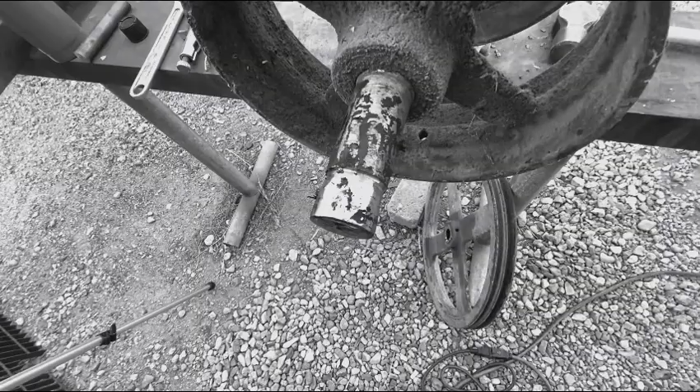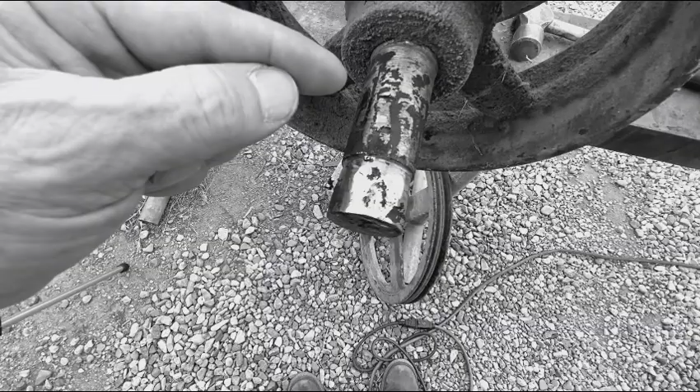So I was saying, unfortunately, the end of the shaft got pretty boogered up with the grinder and everything. So I think what I will do, since I still have over 2 inches here, when I get this all apart, put this shaft in the bandsaw and just cut it off.

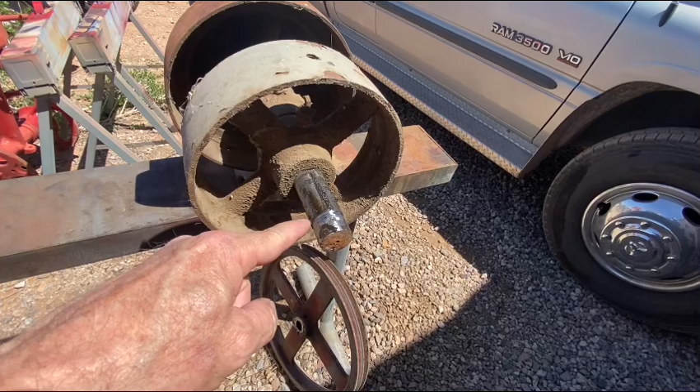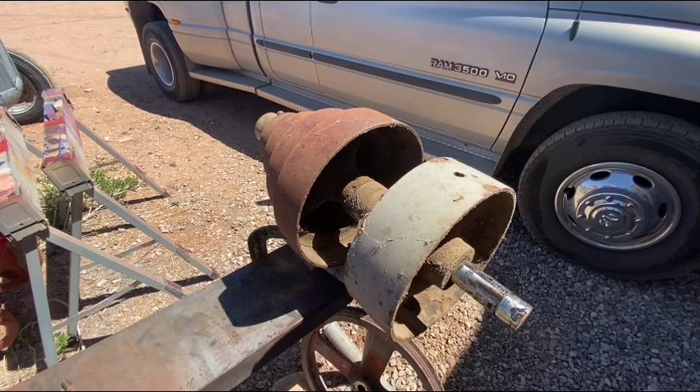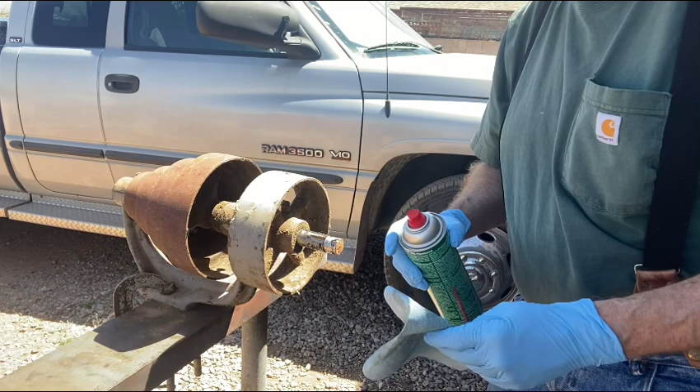I have got to clean this shaft up and then start loosening set screws, set bolts. Sorry, the shadow there, you probably can't see that. Square-headed set screw there. And let's start disassembling this whole thing. Prep it for witch's brew and wire wheeling and going in the bandsaw and cutting that ugly nub off.

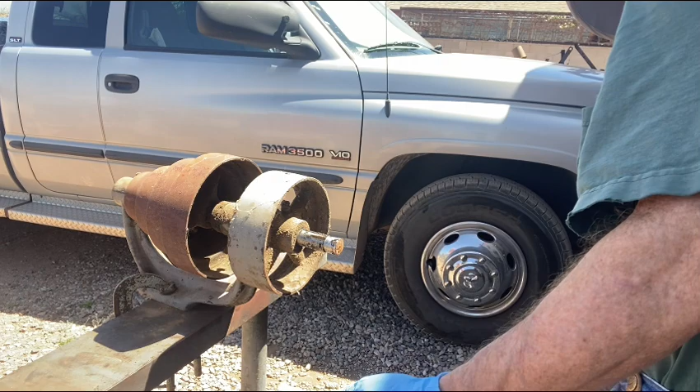What is this, around the 20th of April? Normally, this time of year, here in southeast Arizona, we are in the 90s. But for some reason, it's been this way all year. Winter was cold. We are in the low 80s, which is unseasonably cool for us. Normally, I'd have the old Portacool going full tilt in the shop right now. But no, it's not hot enough for that. Humidity today is like 19%. So the old joke, in Arizona, it's a dry heat.

And there's 2 set bolts on this boss right here over the shaft. One's missing. I'm not sure what they're supposed to do. Because if you tighten it down, it's going to lock on that shaft and then this whole thing won't spin at all. So I'm not sure what that's about.

Anyway, get this square-headed bolt inside this pulley off, and believe it or not, I don't know if you can see it or not, the 12 millimeter fits it perfectly. I thought that was interesting. Now it's a pretty tight fit between the spokes of this belt pulley.

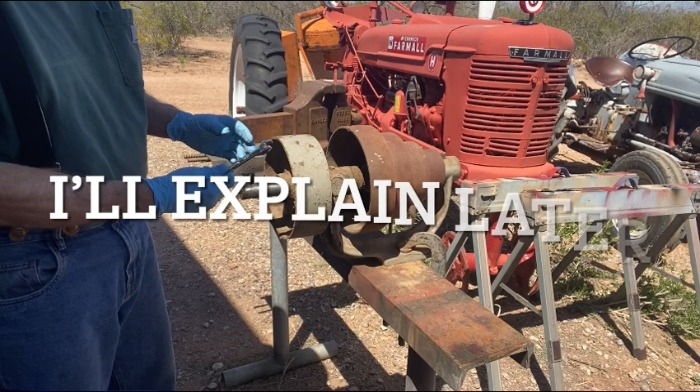I can't get into the mind of a mechanic or a machinist 120 years ago, especially when they didn't have modern crescent wrenches and stuff like that. And the big old clunky Coes spanners they had, although they did have small ones. But I'm curious what they used in the way of a spanner to get inside here and tighten up this square-headed set bolt. Yeah, I should probably do some research on that. Really not important in the grand scheme of things.

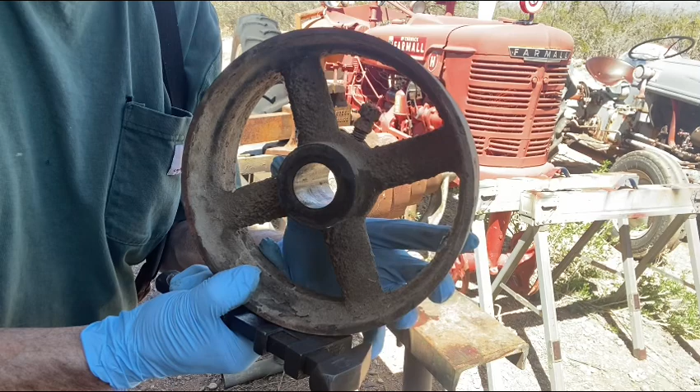It's coming, slow but sure. All right. So you can see that set bolt between the spokes of the pulley. Now this is a very small Pexto adjustable spanner, patterned after the Coes adjustable spanners. This barely fits in there between the spokes. So that would work, but it would be really clunky.

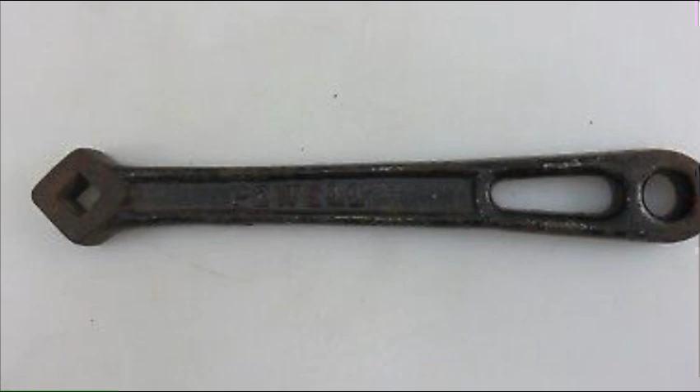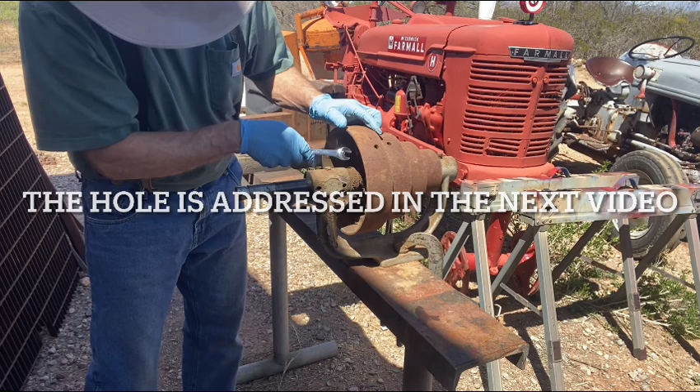We got the same deal on this step pulley here. There's a threaded hole drilled right in the face of this second pulley, right directly above the set screw that holds it in. So, yeah, mystery continues. Obviously, they came up with a mechanical means to install and loosen these set screws. I find this kind of stuff fascinating, vintage machinery archaeology. I mean, I'm a tin bender, and this kind of stuff fascinates me.

You know, I keep telling you guys I'm a tin bender, yet I don't do any sheet metal work on this channel to speak of. Well, half of my career I did sheet metal. The other half of my career I was a ships production controller, specialty in scheduling. I know that wouldn't be video worthy, but tin bending would. I should do something sheet metal for you guys, just to prove I used to do it.

Before I get too carried away here and damage something, I forgot. There's a collar on here that's got set screws in it, so I don't want to go beating on that shaft anymore and leave a big old groove in it. I got to clean all of this gack out of this set screw here. There may be more than one. Let's have a look.

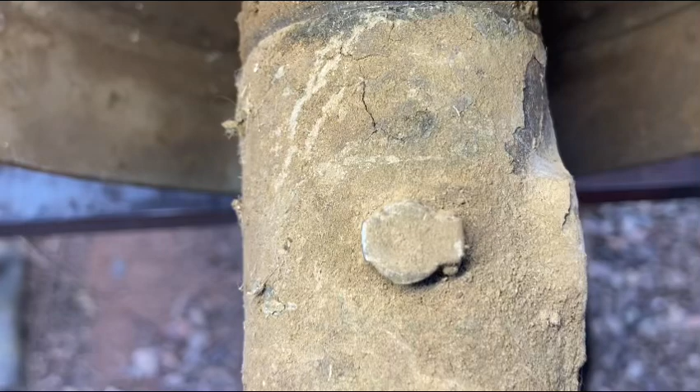Oh, that squeak sounds great. Nah, it looks like there's only one. Let me get this set screw out of here, and then we'll try getting that shaft out of there. Normally you would expect to see a socket head cap screw, set screw in there. Well, that is slotted. I better soak some liquid wrench in there, because sure as shooting I'm going to gall up that slotted screwdriver head.

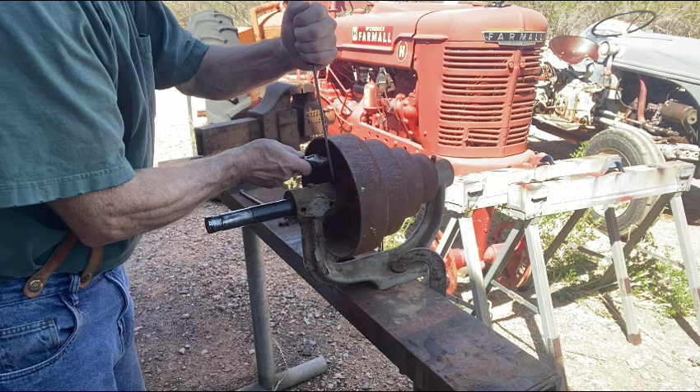I think somebody has had this apart before in the past, because in the face of this pulley there's another hole that's drilled. It's not threaded, but in fact it's right there, and I think that is actually supposed to align over the set screw in this collar, because now I got my screwdriver in there at an angle. Hope I don't strip this out.

Oh, look at that. It's like everything else on this drill press. Comes right apart. Well, I can't exactly say that. Most everything in the way of fasteners came right apart. Some of the assemblies were pretty stubborn. So, yeah, that was a little slotted set screw. Not that that's really interesting, but you get the idea. When I put this back together, it's going to have a socket head set screw in there. I'll double check, make sure there's no other set screws hiding here.

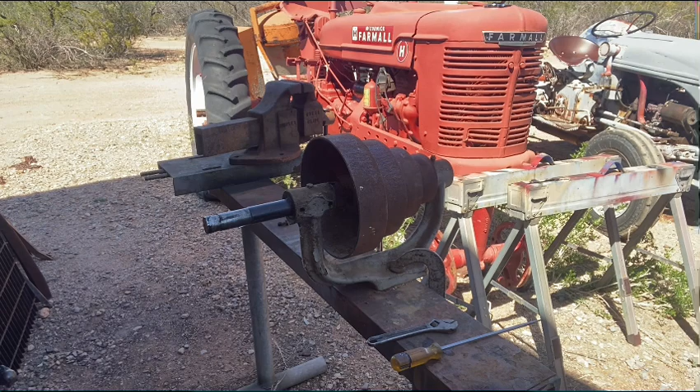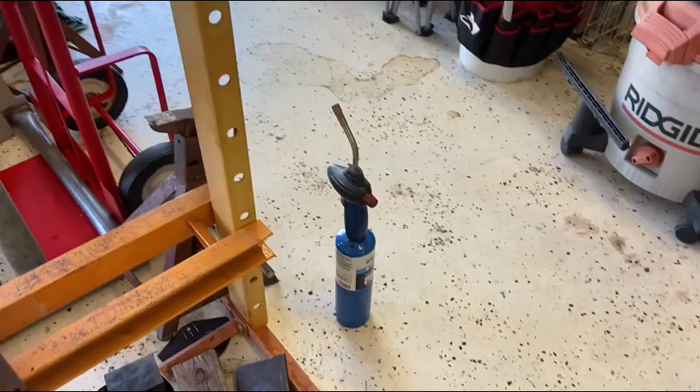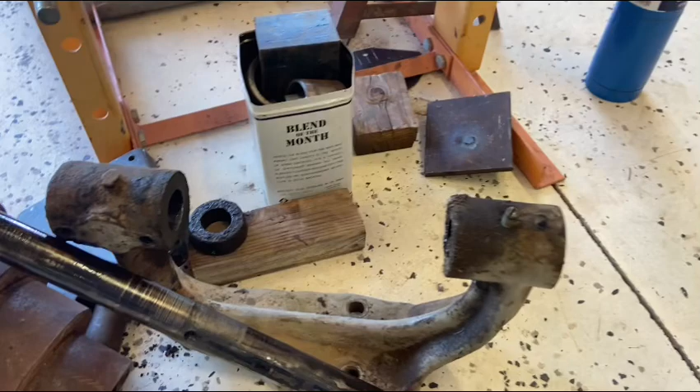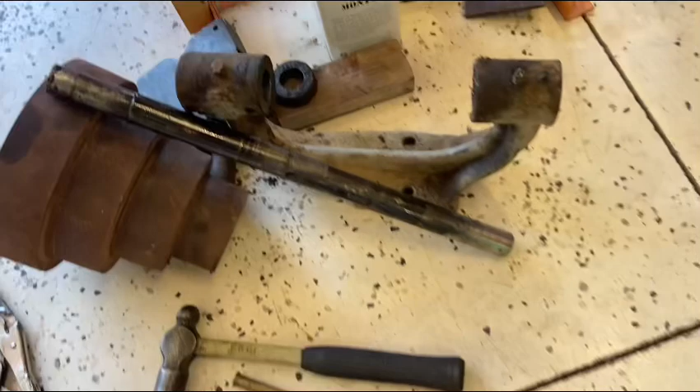Whew, that was brutal. I finally had to resort to the press and heat. So I had this whole assembly upright like that in the press, pushing down on that shaft through these bosses. Everything was tight, and my concern was I would be putting a lot of stress on these cast iron joints, and I was afraid it was going to snap. So I got the heat out and I started heating these bosses here and got them really good and hot, and then started pressing, and that shaft slowly came out, and here's the result. But man, that fought me. So here's the next round of parts to be cleaned up, painted, and reassembled.

I've also got the top bearing caps here for the shaft on the very top of the drill press. Clean those up and get them squared away. This one I've already started on. It's cleaning up pretty good. I've got to get some felt out of the wife's hoard. Cut some felt to fit in these spots right here. So that'll keep dirt out of the bearing shell and off the shaft, but allow oil to drip on through that hole. We get lube on the shaft. As you can see, that's all the old hardened paraffin-based oil full of dirt. About have to chisel that off.

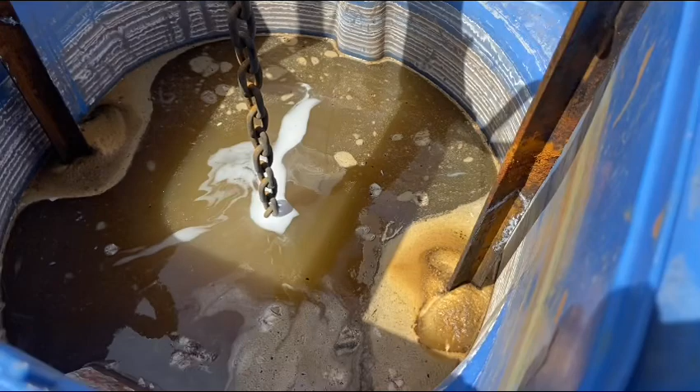If you've been with the channel for a while, you know exactly what's going on here. For those of you that are new, you've probably heard me refer to the witch's brew a few times. Well, this is it. Yeah, and for those of you that are new, if you want to know what's going on here, you can go back on the playlist on this drill press series, and you can see where I start fooling around with electrolysis.

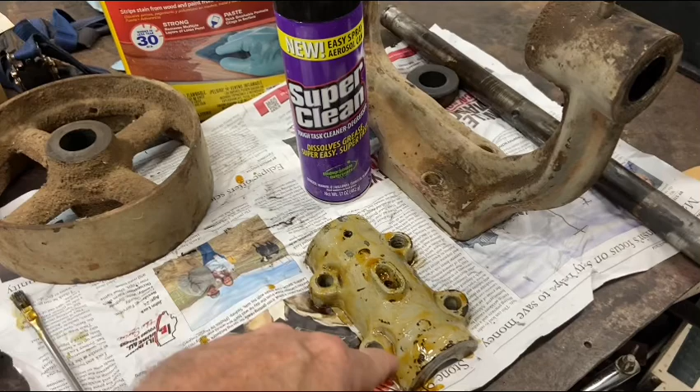I've applied the 1-2 punch here. Took some Super Clean and a wire brush and some water, and I got that bearing shell all cleaned up. As you remember a couple clips ago, it was loaded up with hardened paraffin-based oil and dirt. That all scrubbed off with the Super Clean. Now I've applied a coat of Klean-Strip stripper.

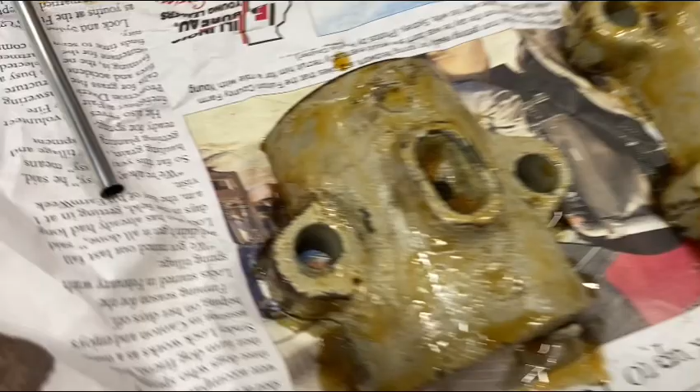I'm not sponsored by either of these two. It's just what I use to get that old paint dissolved, and as you can see, it's already starting to work its magic. So I'm going to let that sit for a couple hours, and we'll take a wire brush, clean all that old paint off of there, and then we'll get some fresh paint. I think it's time for a new

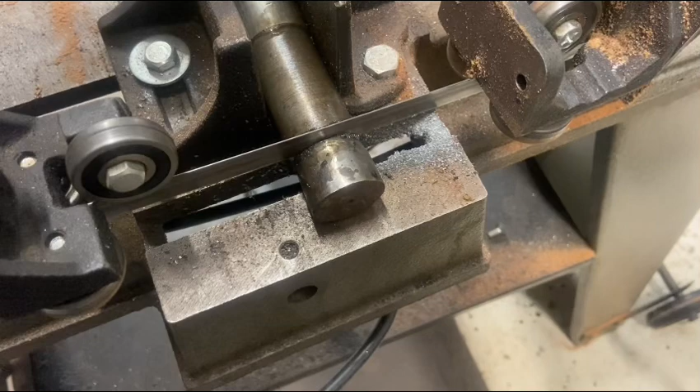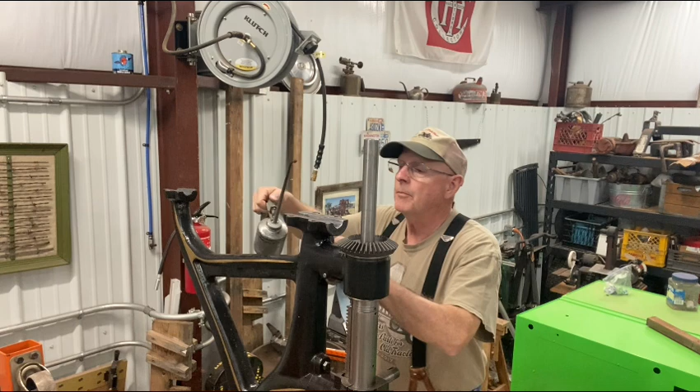blade. Well, while the lower belt pulley is being cleaned and witch's brewed and reassembled and all that stuff, I figured, well, I might as well reinstall the upper shaft and pulley, and get that going anyway.

Get a little oil on here just to pre-lube this before I put the shaft in. I still got to find some felt in Nancy's hoard of fabric, so I'll have that to put in the little oiler area on the bearing shells that fit on the top here.

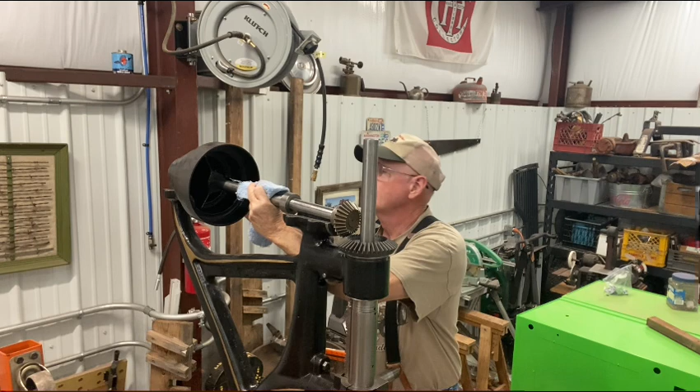All right, let me grab that shaft. I forgot how heavy this thing is. Man, oh man. Let's see, what am I doing wrong here? There we go. Looks like I gotta loosen this collar just a little bit to make that all slide in together. All right. Let's see now. That looks good.

Right about there. I'm gonna leave just a little bit of a gap there, just a couple 3/1000ths maybe. Just allow a little clearance, so I don't build up friction of anything rubbing on the bottom bearing shell here. All right, that's good.

I've been having a lot of doofus moments in the shop lately. I don't know where my mind goes sometimes. You know, forget everything I said earlier in this video about square-headed bolts and not understanding what kind of wrenches they used back in the day. I mean, I know this stuff. I just forgot it. Just a quick search through my Encyclopedia of Antique Tools and Machinery. I mean, back in the 1880s, they were making open-end wrenches for squared bolts. I mean, it only makes sense. If they're going to make square bolts, they got to have a wrench that fits it.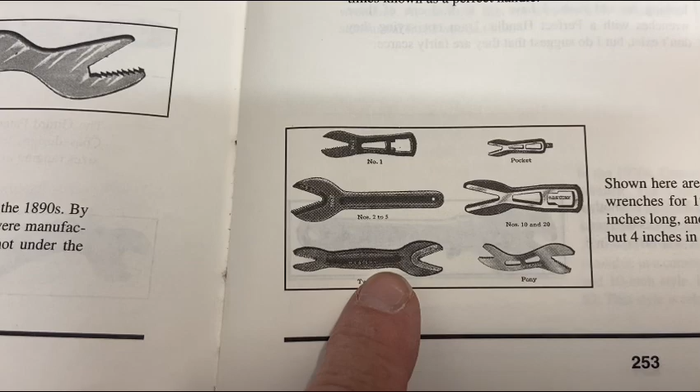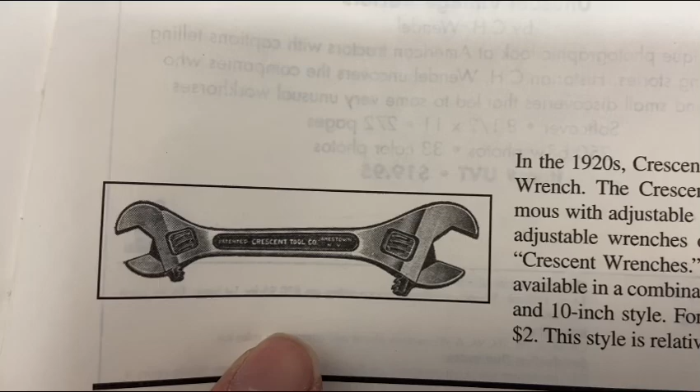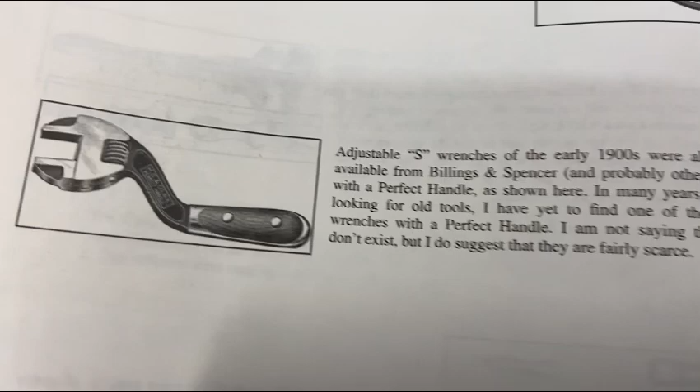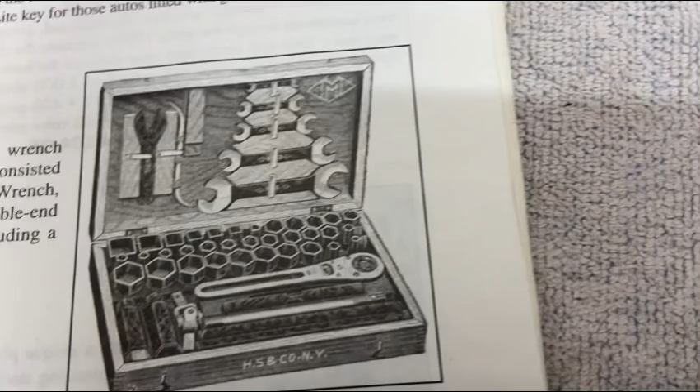I frustrate myself sometimes. I totally forgot about alligator wrenches, which were made specifically for square-headed bolts. 100 years ago, Crescent made a double-ended crescent wrench, so they've been around longer than I realized. For some reason, my mind was just flat stuck on the Coes adjustable spanner types. Early 1900s, the S wrenches. I mean, yeah. Look at all of this. Look at this tool kit. Look at all of these spanners that would fit square-headed bolts, and sockets with the right number of points. They had them back then. My brain just went sideways.

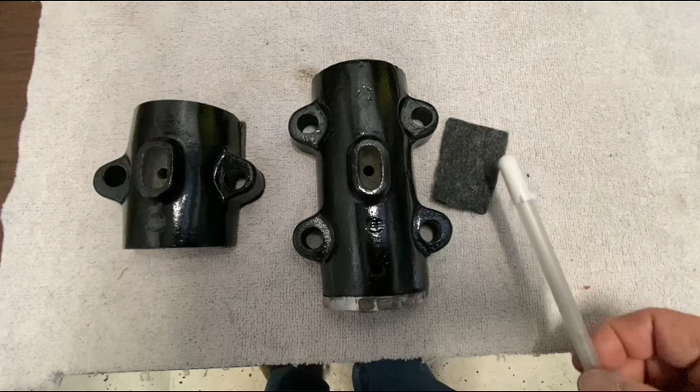Okay, I got some felt from the boss, and I am going to trace around these oilers here and get some felt fitted inside here so I can use the felt as the absorption media for oiling these bearings on the top shaft of the drill press. The felt is cut and installed, so let's get these bearing shells up on top of the drill press.

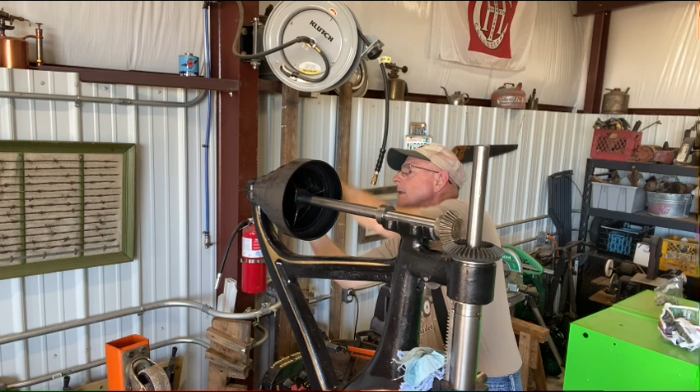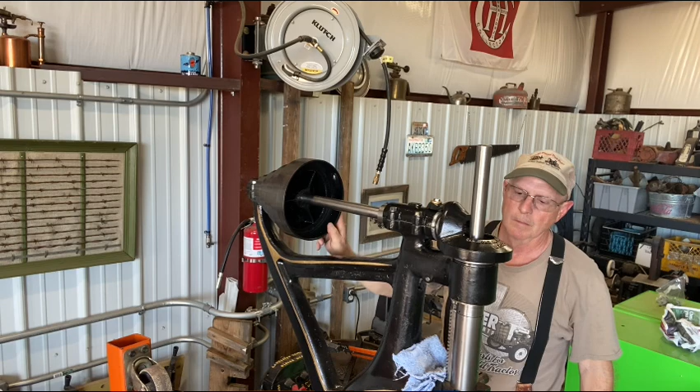These are the existing bolts. I'm going to use them temporarily because threads are rounded over and stretched and everything else. I'm going to replace all the fasteners on this thing with grade 8s. And I think they will accent the striping color and look good, and of course be a little more sound holding things together. Oil these felts really good. I like it.

Well, once again, this got away from me. I let it go way too long. Oh well. Apologies. I also apologize for that long drawn out rambling, babbling about square-headed nuts and bolts and how did they do it back in the day. And I knew how they did it back in the day. It just completely escaped my brain. But my curiosity got the better of me. I started looking things up online.

I realized, I got books on this stuff, and I opened them all up, and spanners galore, all kinds of stuff, sockets. I mean, when they were building wagons 200 years ago, they were using square-headed bolts, and they had wrenches for them back then. So, yeah, when they were building this stuff, they had everything they needed for square-headed nuts and bolts. Another doofus moment in the shop. Oh, well. Sorry about that.